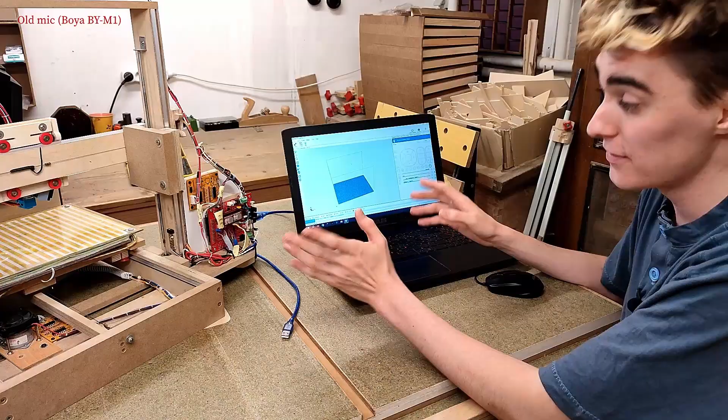The way this is supposed to work is by connecting it to a computer over serial, hence why the USB port on the Arduino was so important. For the software, I downloaded Repetier Host because it seems to be one of the few slicers that don't entirely rely on an SD card to transfer the G-code. I could use pretty much any other G-code sender, but when they're designed for a CNC router, they don't have the nice buttons for preheating the nozzle and whatnot.

The last time I hooked the Arduino Mega up to the computer, right after installing Marlin on it, I was able to connect, but it pretty much immediately shut down again due to the floating thermistor pins returning erroneous values and tripping over temperature protections.

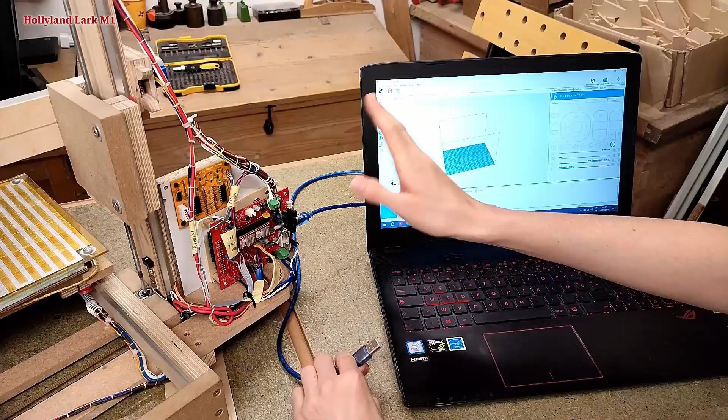So now, with the shield and everything wired up, I should be able to communicate with it and finish setting everything up. But when I did just that, I was greeted by the one thing I hate the most when working with CNC: an error message. A fatal error on the printer's side. Stop the printer until the error is fixed. Max temperature triggered. System stopped.

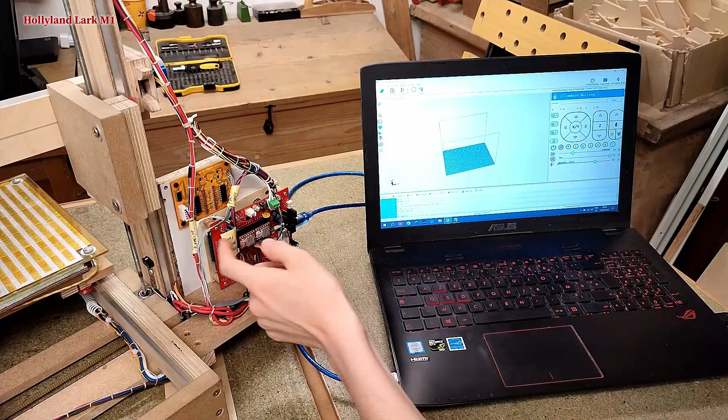For some reason, I was still tripping thermal runaway, even though the thermistors should have been providing the sensor inputs with a steady value. Double checking the wiring and probing the thermistors with a multimeter, the heat bed thermistor measured fine at around 5 kiloohms, but the hot end thermistor was dead short. Turns out the screw they used in my cheap hot end kit to keep the thermistor inside the heater block was screwed in with such excessive force it chafed its way through the insulation and literally shorted out the sensor. After fixing that, the thermistor was just fine.

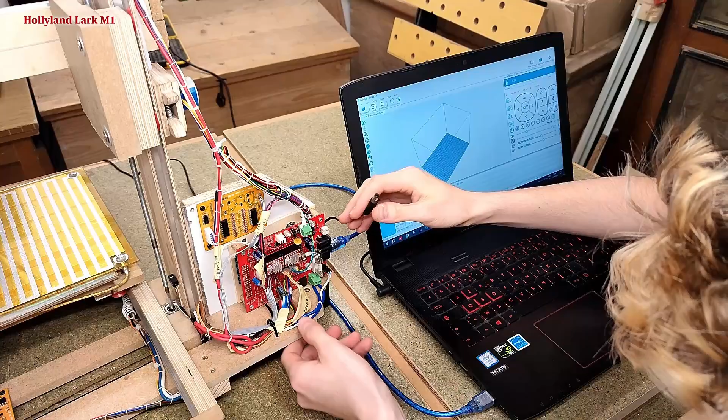So next, I tried to plug in the first power supply, the one for the Z-axis motor, because up until now, only the Arduino was running, powered by the USB port.

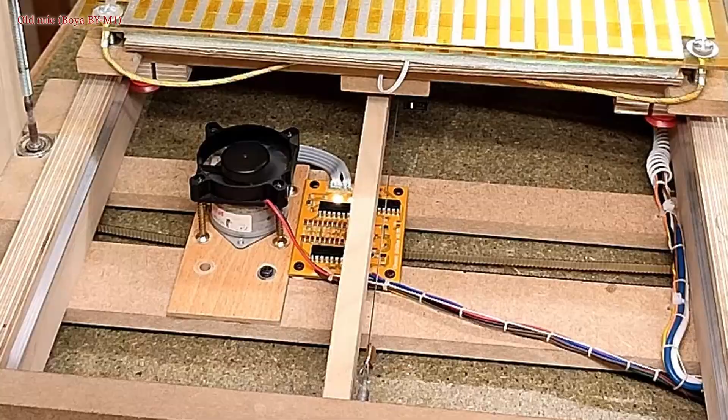Yeah, it's working! I can't believe it. It actually worked first try. And so did, miraculously, homing it.

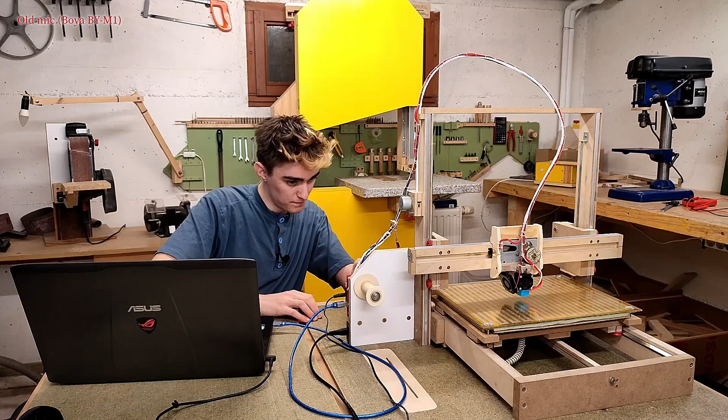As much as I'm used to my electronics never actually functioning when I power them up for the first time, the entire test of my DIY controller shield was pretty anticlimactic in hindsight. Of course, there was a moment of apprehension every time I plugged in a new power supply in case something would release the magic smoke. Nothing happens. Is that a good thing or not? But each time I was pleasantly surprised, it just worked.

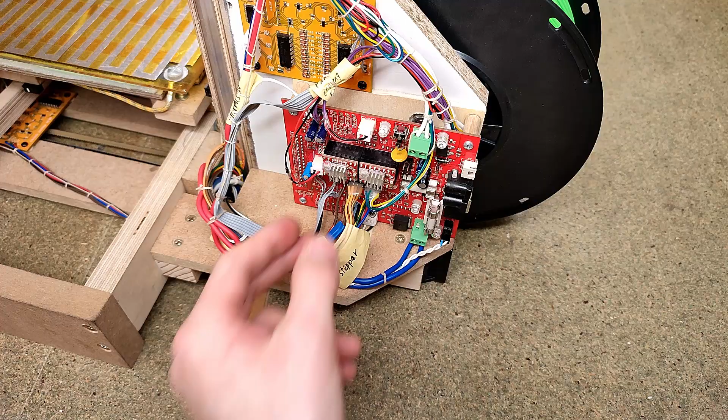Oh yeah, it's working! Obviously that was to be expected since I literally just copied the RAMPS board for my design, but you know how easy it is to make stupid mistakes when creating a PCB. The X and Y axis motions ended up being inverted, which was rather easy to fix by simply flipping the stepper motor plugs. Now, the one thing I was most worried it would fail was the MOSFET switching the heaters, because as opposed to all the other components on the board, I had used pretty much random ones salvaged from e-waste instead of the ones listed on the original RAMPS 1.4 schematic.

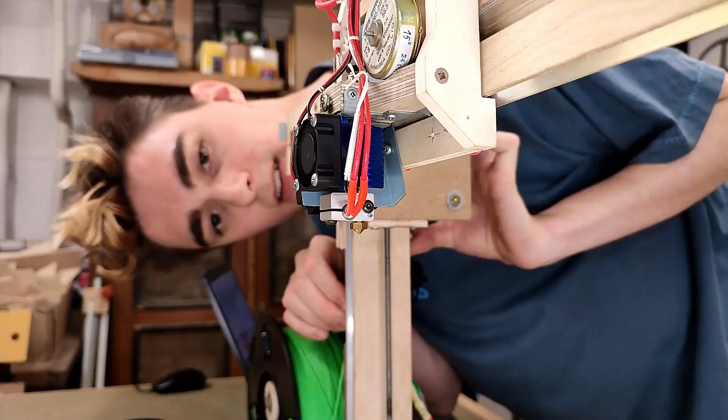But again, it worked like a charm. The hot end heated up, I was able to extrude filament, the part cooling fan ran fine, and the heated bed got warm. We have a warm heated bed!

So it was finally time to try printing something, and since I'm still more used to CNC router type machines than 3D printing, I wanted to do a practice run first without actually extruding anything. I already had it going when I realized it was preheating the nozzle and about to embark on the real deal unless I actively disabled the extruder. So I quickly stopped it again, and after changing my mind on the dry run and leveling the bed, I was ready for all my hard work of the past 2 years coming to fruition.

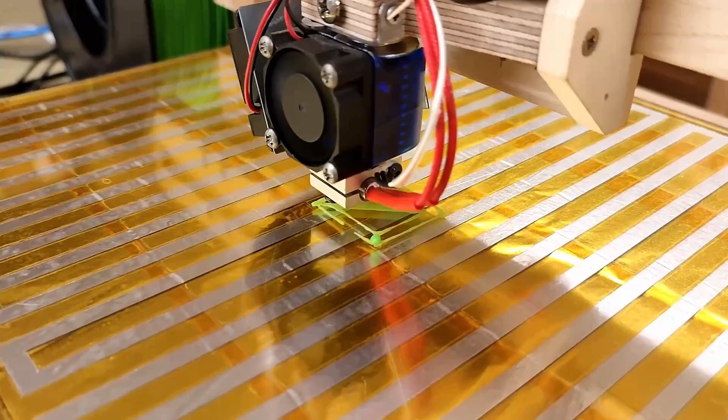It's printing! Oh my goodness, this is insane. It's horrible, but it's printing! Can you believe it? It is a 3D printer. It just works. Well, it doesn't work very well, but it is printing. Can you believe it? It's actually printing.

Just look at my face here. There I am, never having seen a 3D printer in person before. I spent 2 years of my life building this thing because I made videos about it for the internet. I have no idea how to use a slicer or what settings to use, and this thing just starts printing. That is absolutely amazing.

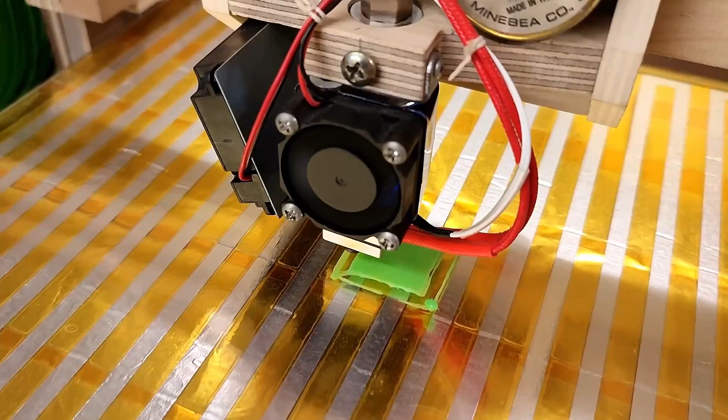I had no idea what settings to use. I just ran with something, and it is printing. That is incredible. It makes a hell of a lot of noise, but it's printing. It's not gonna be a good cube, but it's gonna be a cube. Oh my, I cannot believe it. This is so weird.

Now, unfortunately, this print failed relatively soon after due to the filament breaking and jamming the extruder. I have no idea why I kept trying with this horrible filament. I purchased it 2 years ago, and even though I never opened the sealed bag until recently, it soaked up so much water over that period that it sputters and foams up during extrusion like crazy. Maybe it even degraded, because it gets pretty liquid at the 200 degrees I was printing it at, even though the label says 205 to 220 degrees. Either way, it is in no condition to do any printer a favor. However, I pressed on with the next attempt anyway.

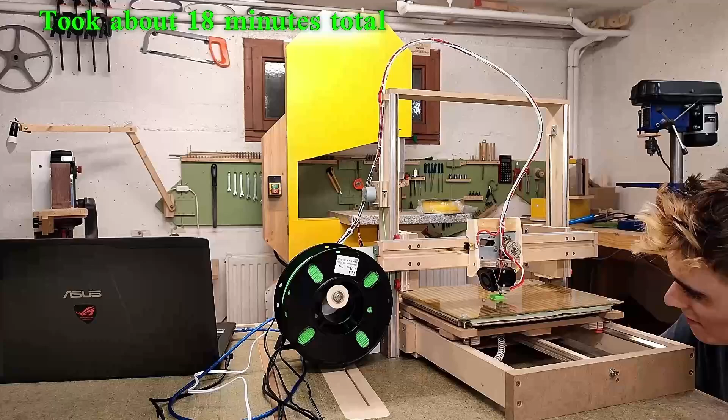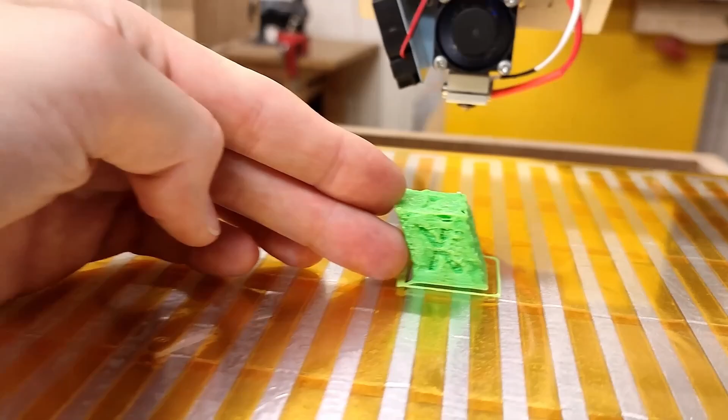And that is the very first successful 3D print finished, if you can even call it successful. It's very slanted because obviously the X-carriage is moving relative to where it should be. I already hinted at something like that in an earlier episode, and obviously it is happening. The X-carriage is moving over time, so every print will probably be like this until I do the lead screw upgrade. But since I need to do that upgrade anyway to get better resolution, I don't need to worry about it much.

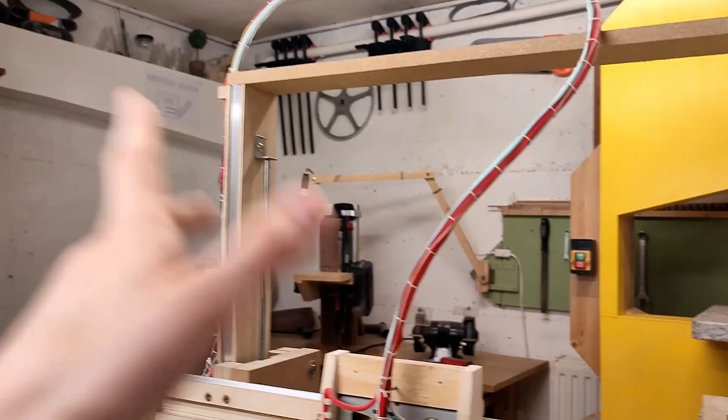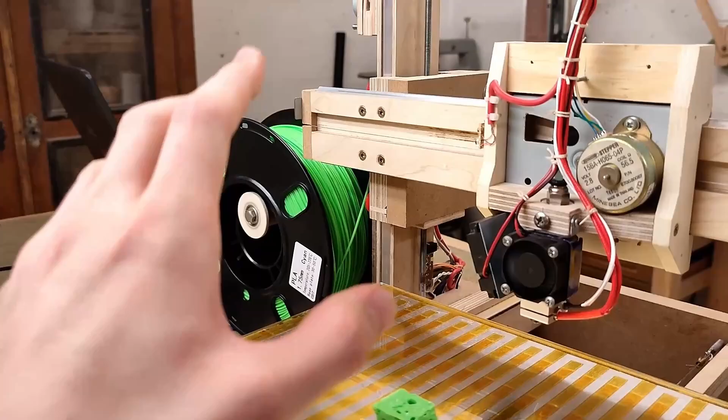The horrible filament is probably not doing it any favors. The printer isn't that terrible, I guess. We do have a very long Bowden tube, and people were worried about stringing — we do get some stringing here, and some weird extrusion issues. The fact that I only have one part-cooling fan probably isn't helping either. So this side is weirdly extruded, but a good chunk of that might just be the filament. This filament is absolutely awful, I don't know what's wrong with it. I'm gonna try the other filament next, the yellow Geeetech one, and see if that's any better.

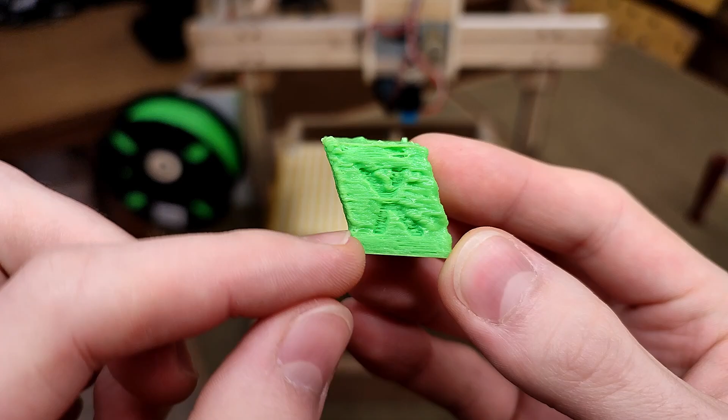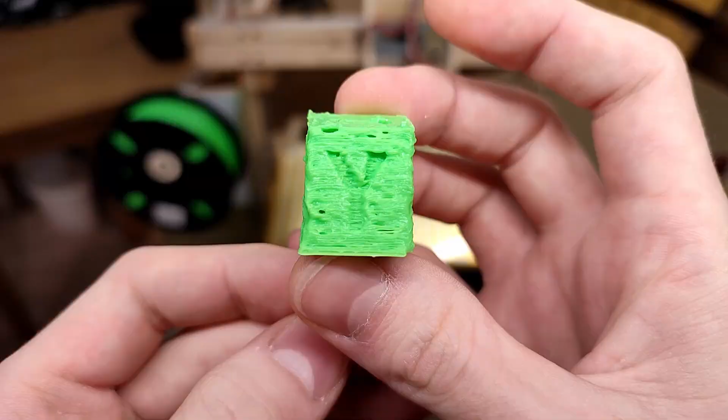Okay, now I really owe you the explanation for why we're getting these insane amounts of layer shifting, and let's just ignore all the extrusion issues, most of which were indeed purely down to the crappy filament. As you might have noticed, we're really only getting layer shift in the X direction — the Y-axis is pretty much perfectly straight. That's because, as those of you who followed most of the series will know, I used this wonderful 90s technique of a tensioned fishing line wrapped around a drive drum for the linear motion mechanism.

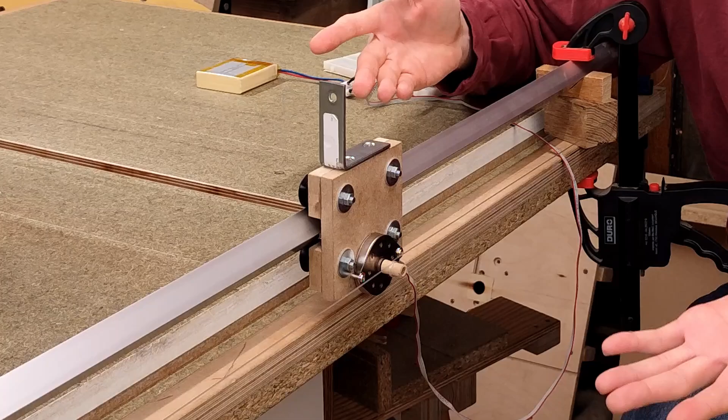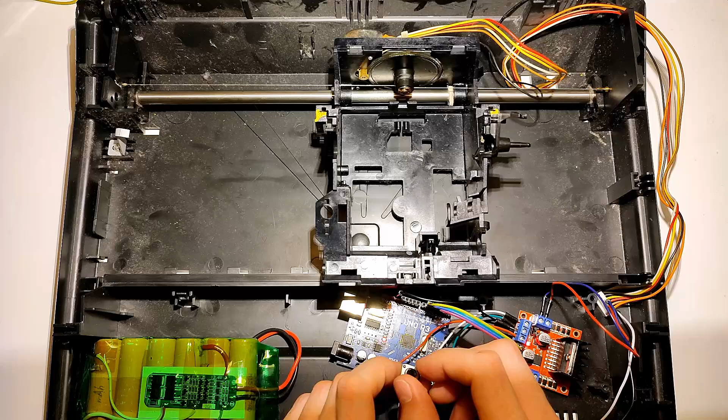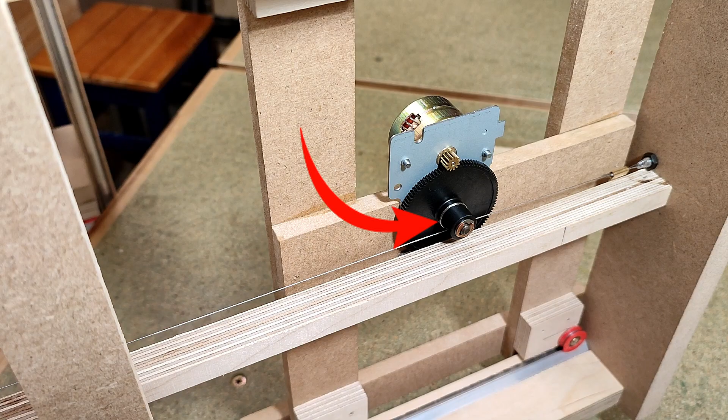The only difference between the X and Y axis is that the Y-axis motor had already been used in that very configuration to move the carriage of the typewriter I got it from back and forth, while the now X-axis motor used to spin the daisy wheel. On the spur gear of the Y-axis, you'll notice this big cylindrical section the string is wrapped around, which, for lack of a better designation, I call the drive drum.

Now, if I move my model here back and forth, you can see the coiled up section of string creeping up and down on that cylinder. And despite theoretically introducing an ever so slight cosine error into my positioning accuracy by bending the string outward or inward whenever the carriage is not in the middle, this is actually vital to functionality.

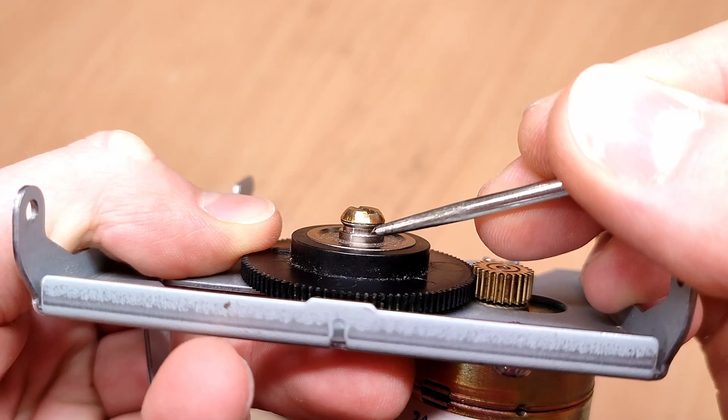On my x-axis gear, there was no cylindrical section, just a tiny groove for the daisy wheel to snap into, and because adding one would have tanked my steps per millimeter ratio due to the increased drive drum diameter, I simply ran my fishing line inside the groove.

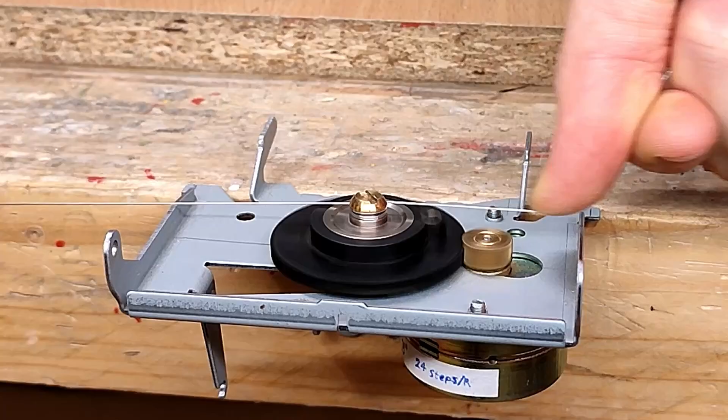Now, with the string suddenly trapped between two flanges, it cannot move up and down anymore, so it tries to climb up the flange to get there, which ultimately doesn't work, and the entire winding has to slip up the groove to make space for any new string to be wound up.

And as you might have guessed, on a rotating cylinder, it doesn't just slip axially with the rotation, it also slips in the rotation itself, because the one premise this entire method of propulsion is based on, friction between the string and the drive drum, got violated.

Now you might wonder, why does it creep primarily to the left and not equally in both directions the way probability would suggest? Simply because in a mechanical system with a random component like this, one direction always comes up on top due to the tiniest irregularities in literally anything. In this case, it might be the surface finish inside the groove and of the fishing line. I don't know, it doesn't matter.

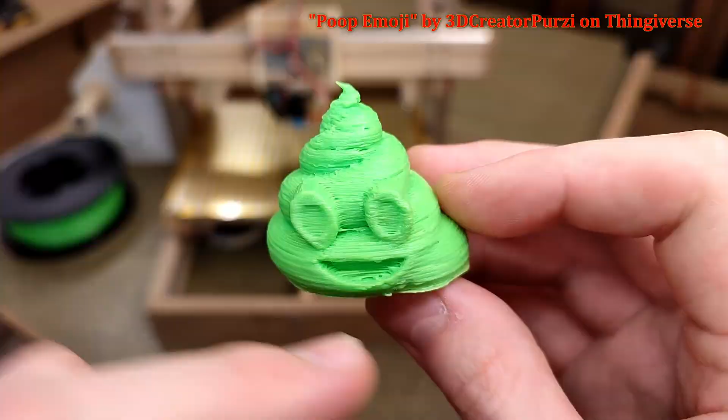Now back to my poopy prints. You might be slightly confused right now, wondering where all the layer shift went on that emoji. No worries, it's still there if you look closely, just much less pronounced.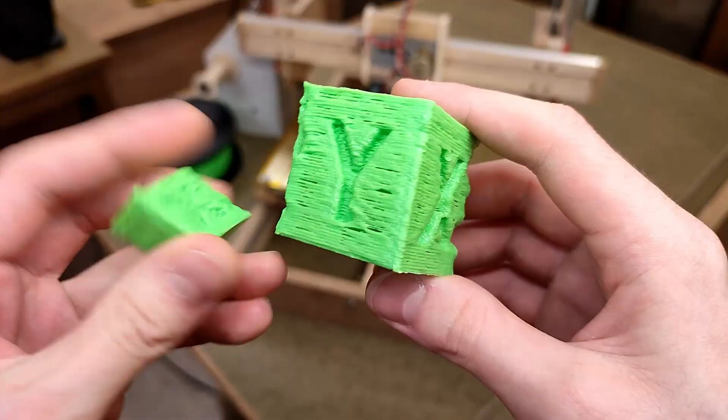Turns out, the simple act of tightening the fishing line was enough to rein it in to a much more acceptable level. The next cube I printed, a big one at twice the size, was already much straighter, even though you can still see a lot of under extrusion pretty much everywhere. This was with a 1mm nozzle and 0.4mm layer height, by the way.

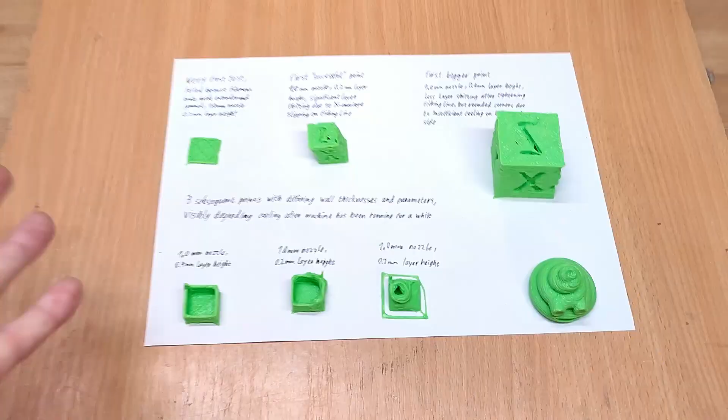I also ended up printing a few little boxes to try various settings, but those came out progressively worse. The only other thing we can learn from these tests is that my single-sided part cooling fan is definitely having an impact, as on all these prints you can see the right-hand side corners are a lot more blobby and melty than the left side where the fan was.

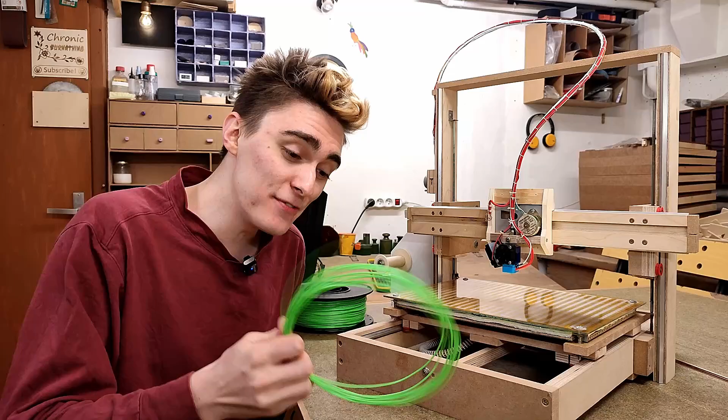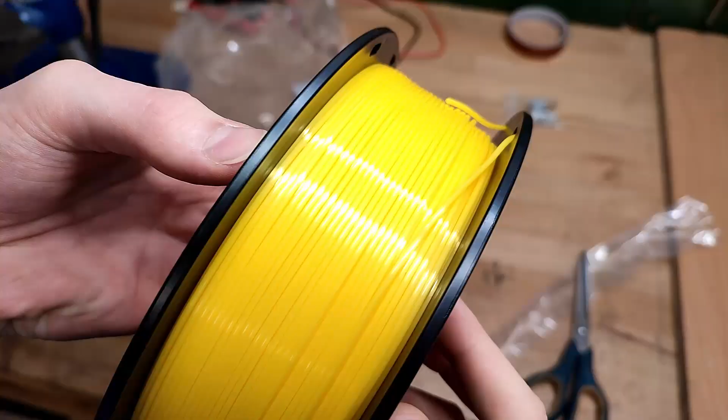So the green filament was obviously garbage, and to find out if this printer is any good, I needed to use something better. Fortunately, I had bought some Geeetech PLA just 6 months prior, so I got that unboxed, and oh my god, was it a lot better. It didn't even snap into 1,000 pieces like dry spaghetti when I bent it.

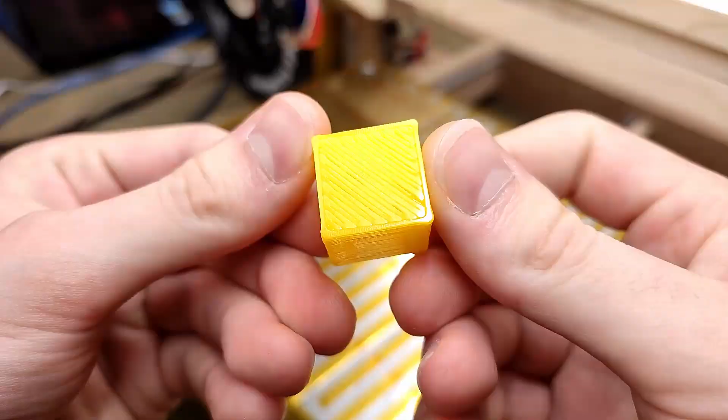And I couldn't believe my eyes when I printed the first test cube with it. The first layer was almost closed, the letters were legible, the sides smooth, only the top was almost as bad as before, but I suspected the slicer to be at fault for that, and most importantly, there were far fewer spots suffering from under extrusion.

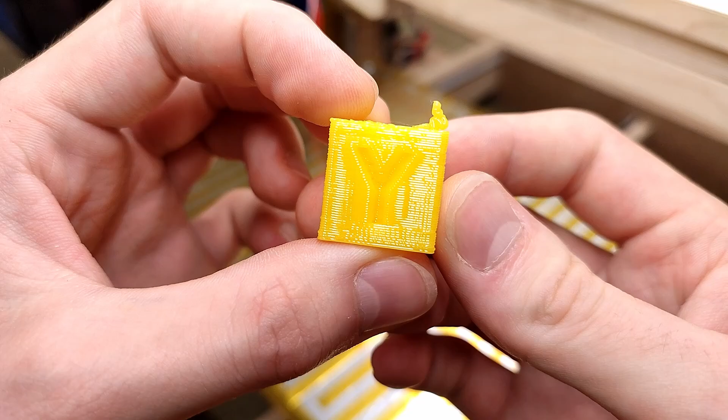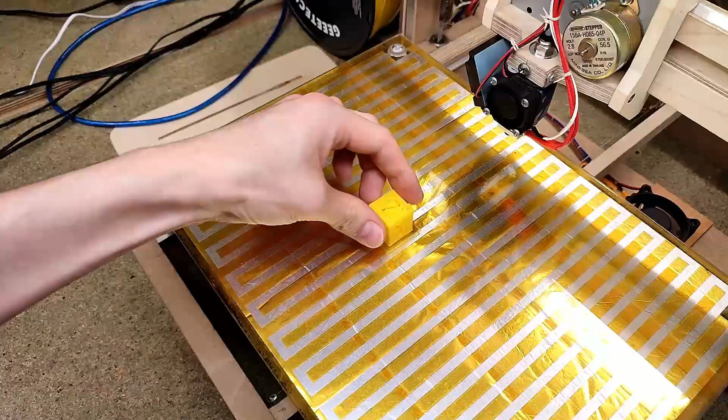Measuring the dimensions really didn't make any sense yet, but ironically, it was pretty darn close on both the X and the Y. I was so impressed, I immediately switched the 1mm nozzle to a 0.6mm one and printed another cube with 0.2mm layer height. As expected, that one came out a little more detailed, but not really any different overall.

And that's where I'm at right now. With a decent filament, it prints in a way that, while it couldn't be described as good in the grand scheme of things, is certainly good enough for us to actually see some of the inherent issues and to start using it to print parts in order to improve it.

Taking another look at these cubes, we see a mind-boggling amount of ringing and bulging corners. I did expect some heavy overshooting of corners simply from the large squishy steps of the motors swinging those carriages around in 0.1mm increments.

Just listen to the way it sounds. That cannot be good. Since that'll totally disappear once I install lead screws on this thing, I'm not even gonna bother trying to fix it right now, unless some change in settings happens to reduce it anyway.

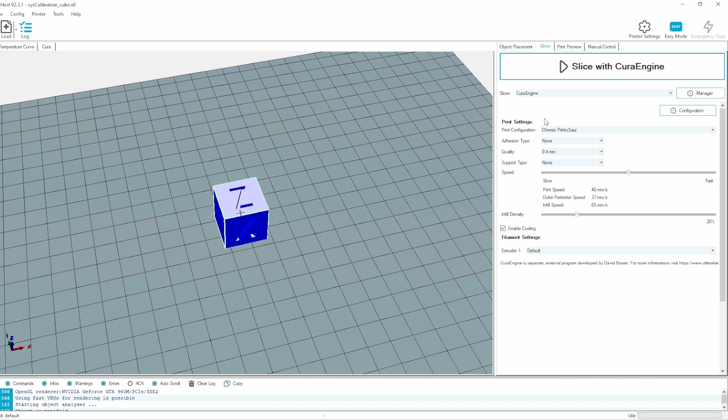The messed up top infill turns out to be a slicing issue. These parts were sliced using Cura engine in Repetier host, and if I do it again just now, you can actually see it trying to lay down the solid infill for the Z mid-air. That's never going to work. In addition, the top and bottom thickness was set to 0.6mm, which at 0.4mm layer height somehow works out to 2 layers.

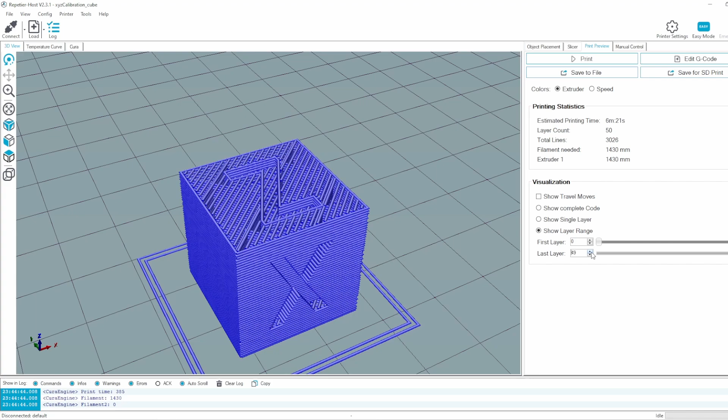I told you I had no idea how to use a slicer. However, since in the meantime I gathered a lot more experience using Prusa Slicer, and now have at least a rough idea of what most settings do, I'm going to use that to slice all my models from now on, and use Repetier host exclusively to control the printer.

Much more concerning is that we're still getting some occasional under extrusion here and there. That in itself isn't surprising, considering I used a 28BYJ-48 for the extruder and didn't shorten the Bowden tube. People in the comments told me I would get under extrusion, and I guess you guys were right.

Since I realized I could have mounted the extruder all the way at the top of the gantry, thus eliminating about 6 inches of unnecessary Bowden tube, I'm gonna take care of moving it up there right now before doing anything else. Of course, I don't want to redo all my cable lacing, so I'm gonna secure the last nut I want to keep with super glue first.

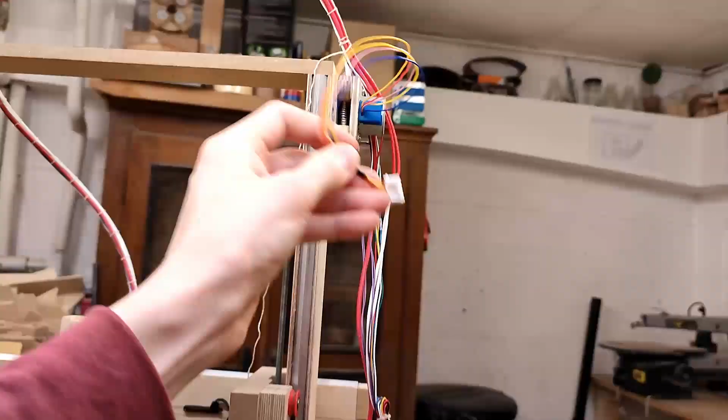And now my stepper motor cable is too short to plug into the driver, which is the exact reason why I didn't put it up there originally. So I'm gonna have to whip up a little extension.

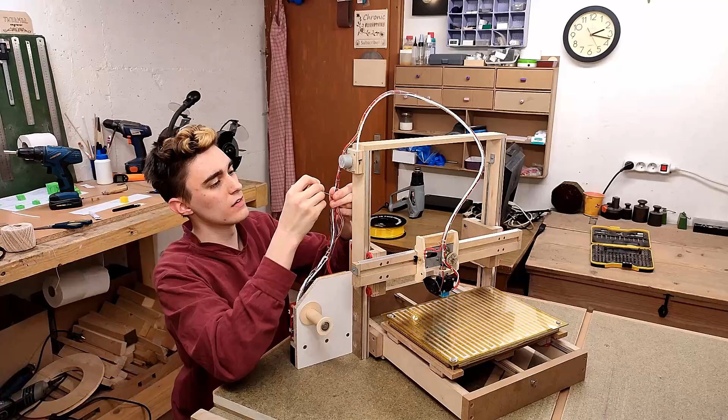Finally, I'm also going to torture that 28BYJ-48 just a little bit by replacing its 5V power supply with a 6V one. Someone in the comments mentioned they don't necessarily burn out on 6V, so we're doing it because I need every little bit of extra torque I can get here.

I will go back to 5V later though, because when I install these screws, I'm also going to put the extruder on the X carriage together with the hot end in a direct drive configuration. That'll get rid of the Bowden tube altogether, and thereby theoretically should require much less torque from the extruder. Anyway, let's set it up to print something.

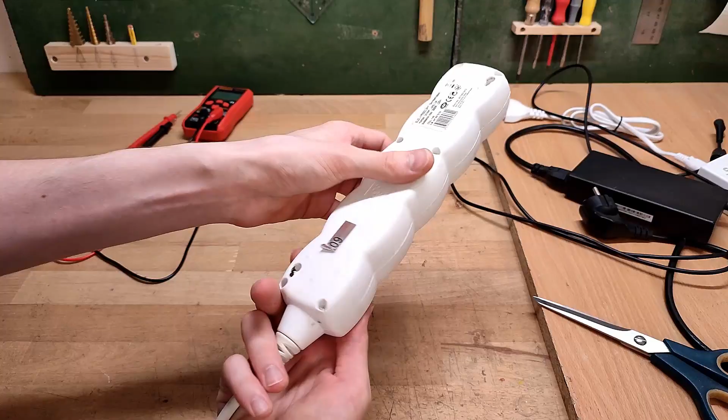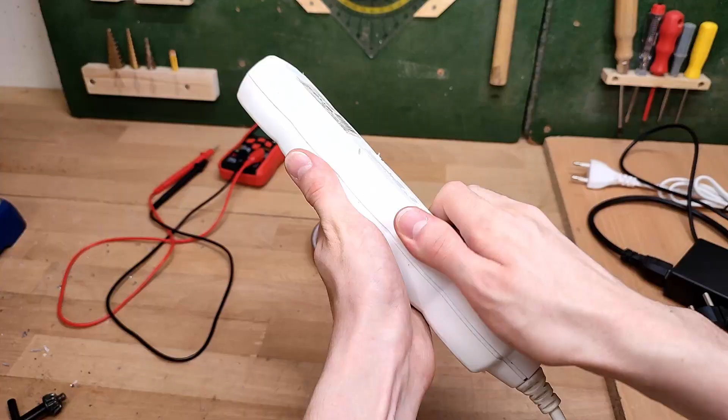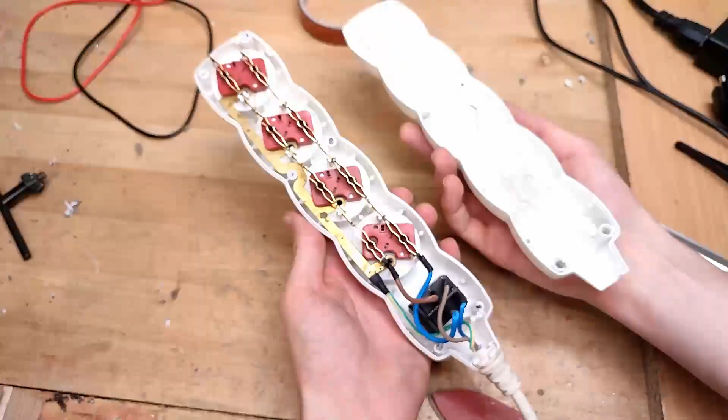I'm pretty sure you already gagged at the idea of having to plug in this many power supplies for a single 3D printer, and yeah, you need a switched power strip for that not to be a pain in the butt. True to the original spirit of the project, I took this one that had stopped working due to the switch contacts being dirty, drilled out the heads of those god-awful unkeyed screws - big Fs in the chat for any company trying to keep me out of their product - and cracked it open to take out the switch. Those generic switches can actually be popped apart with a screwdriver, and yeah, just grimy contacts. Sanded those fresh and clean, reassembled it using super glue to replace the annihilated screws, and wouldn't you know, it works a treat.

Of course, it would be pretty inconvenient having to drag around my normally stationary editing computer to stream G-code to my printer every time I want to 3D print something, so I coaxed this 2009 netbook out of my dad, who primarily used it as a paperweight on some pile of trash, and installed a lightweight Linux distro on it called Q4OS. I did a short about that some time ago, so now I have a dedicated user interface for my 3D printer. Since I'm kinda allergic to tiny screens, I also dug out this thing they used to call a TV back in the day to actually be able to see what I'm doing. So that is why I've had this e-waste collection on my table for the past like 6 months, just in case you wondered. Anyway, let's print a new cube, hopefully without under extrusion.

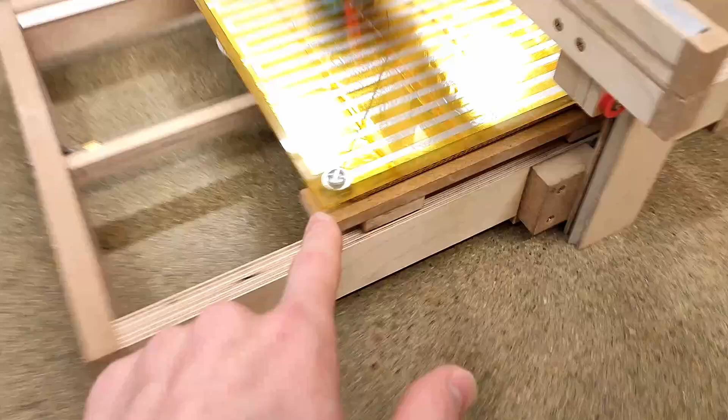Uh-oh, the unthinkable happened. My print bed just cracked. I figured I would manage to smash it sooner or later. Earlier I noticed there was a tiny crack in the corner going to that screw hole. I figured it wouldn't propagate past the screw hole, but when I was heating it up just now, it went right there to the middle of the print bed, which is not good. That's the last thing I needed to happen right now.

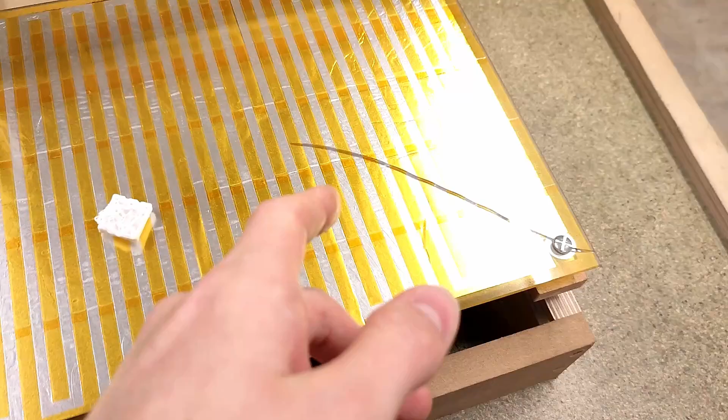Of course my print failed too, because I turned off the heated bed as soon as I saw the crack spread, so the cube detached from the bed as it cooled down. This is definitely one of those situations where you just want to click undo in real life and make it so it never happened. I don't even know when or what I hit it with to initiate that crack.

I guess we're gonna have to print our cube and Benchy on an unheated bed then, until I get an entire new heated bed made for the next episode. What I wanted to say before all this happened is, I'm giving it the best chance at working this time by using a known quality filament, namely some of the leftover Two Trees stuff.

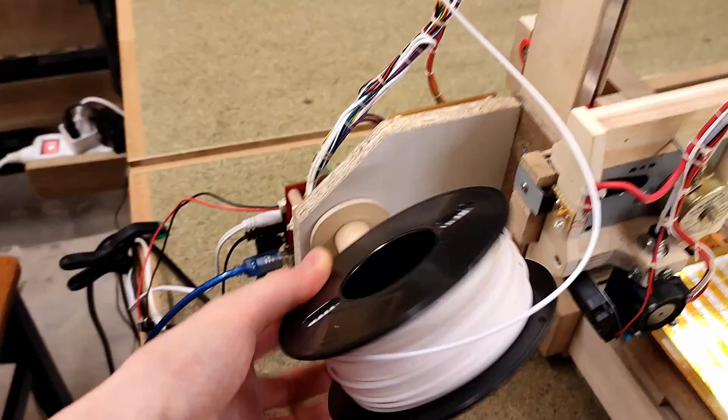I'm sure the G-Tech filament works just fine, but I know for a fact this one somehow extrudes more evenly. Only downside, it has a matte surface finish, which does provide more friction in the Bowden tube. So here's the test cube. I removed all heat bed commands from the G-code, and just to be safe, I'm also going to unplug the bed power supply. Can't risk that crack propagating any further and breaking the bed in half.

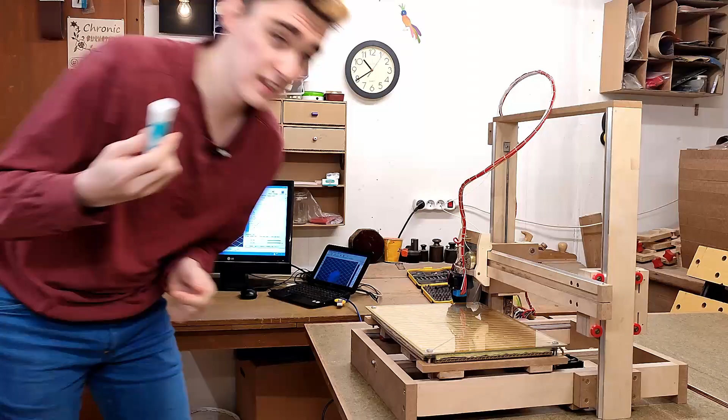Let's crack out the glue stick of shame and see if we can print stuff regardless. Power is on, nozzle heated up, let's run the job. It's homing. There it is, purging.

I really hope that sticks. Doesn't really look like it. Oh yeah, there it goes. Well, that's the grand finale of my video thoroughly ruined. I was planning to print a few other things as well in this episode, namely some bed leveling knobs and an air duct for the part cooling fan, but it doesn't look like that's gonna happen now. I guess glass is glass, and glass breaks.

I was really afraid of something like that happening ever since I made that bed. After all, the design with just a heated glass plate and nothing else to mechanically support it is quite fragile to begin with. Plus, with making these videos, I tend to handle most parts at least twice as much as I would if I just built this thing for myself.

By the way, it's printing with a 0.6mm nozzle and 0.3mm layer height. Not gonna lie, watching 3D printers is pretty boring, and filming them is even more boring.

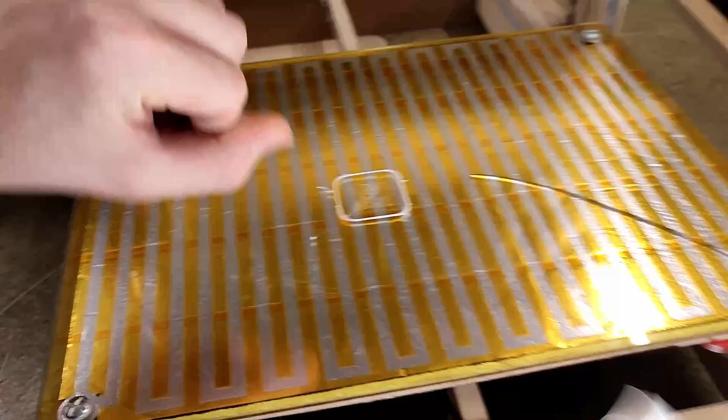Still nowhere near as good as I hoped. The top certainly is a lot better now with proper slicing, but the solid infill still isn't fully closed, and I'm also still getting these weird artifacts. Certainly looks like under extrusion, but I'm not entirely sure. If anyone knows, tell me in the comments.

I'm gonna try the exact same thing again with the yellow G-Tech, just to see if there's any difference. This certainly slides a lot better in the Bowden tube. And that first layer is a lot better if you ask me. Can't really show you because the printer is in the way.

I didn't actually plan on recording this cube at all, but seems like the first layer is a lot better. Twenty minutes later, and there it is, done. At least it's not lacking in the bed adhesion department. Ugh, can't get it off. There we go, not too shabby.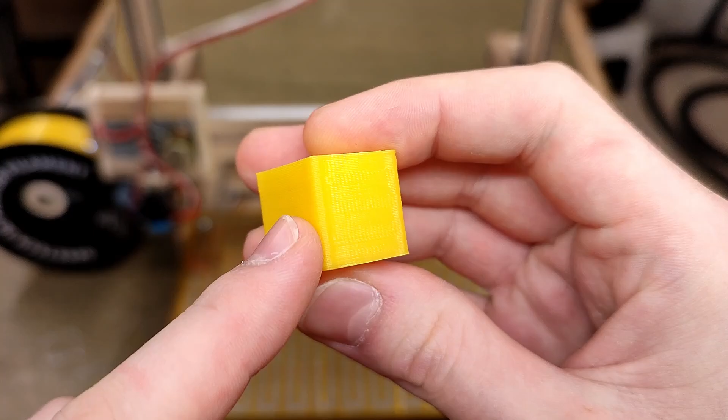I guess it was under extrusion then. Those artifacts are all but gone. That is pretty good, actually. Look at that, we're still getting some artifacts from the stepping of the motors, but this is pretty neat. Even the first layer is almost totally closed.

Interesting. So with this Bowden tube, I'm really operating at the very limit of what the 28BYJ can deliver in terms of torque. Let's do the stupid thing and switch to a 0.4mm nozzle and 0.2mm layer height. Stupid, because with a 0.1mm overall resolution, if the carriage moves just one step further, you immediately get 25% overlap or even a gap between two adjacent filament strings.

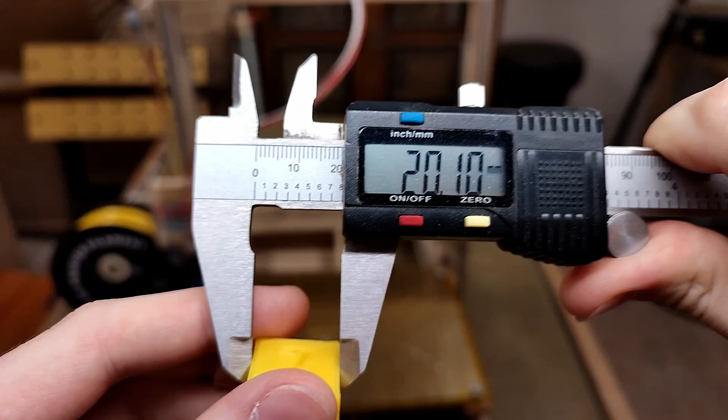I actually saw one of those gaps on the cube already. Right here, the outer perimeter is slightly detached from everything else. That's what you get for crappy positioning accuracy of your printhead. Then again, if I measure this cube, it's surprisingly accurate still. Of course it depends on where exactly you measure it because of all the ringing, but overall, it's pretty good.

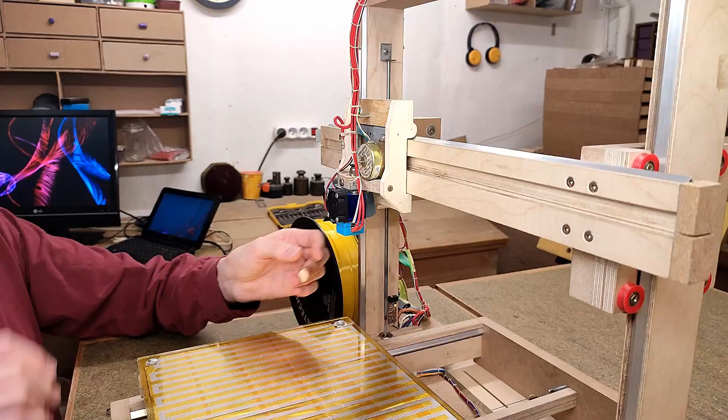Moments later. That generic V6 hot end is a huge pain in the butt to change the nozzle on. I had to take the whole thing apart because the stupid heat break constantly unscrews from the heatsink. Of course, not helped by the fact that my neat cable management doesn't let me pull out the Bowden tube at all, and the silicone sleeve only stays on there with a wire around it.

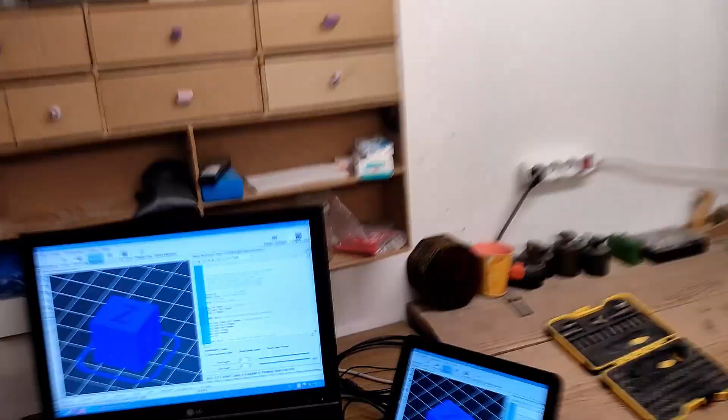Anyway, XYZ calibration cube with 0.4mm nozzle coming up in 3, 2, 1.

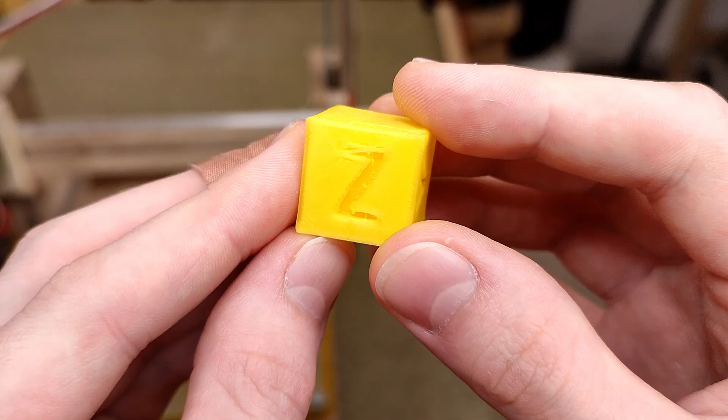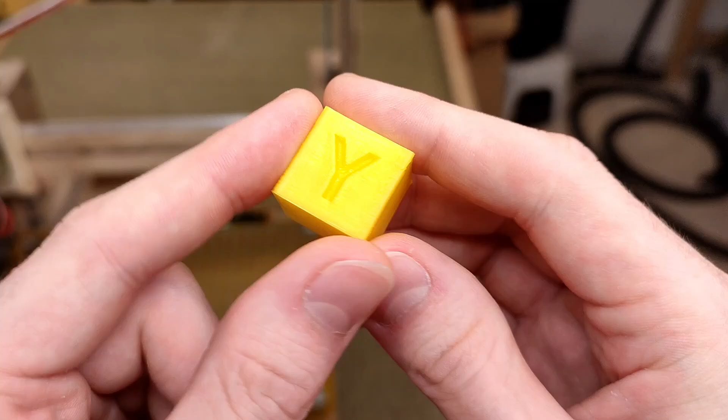This is pretty good. Honestly, I cannot complain considering just how much jankier this printer is than a real machine at least 4 times the cost. Not to mention, we're working with a resolution of 0.1mm here, which is literally an order of magnitude less than what any standard 3D printer does, and yet we still get parts like this out of it.

I mean, it is a shame it has this chronic layer shift going on, making every print slanted, otherwise these would be some totally usable parts, but it's pretty impressive nonetheless. Plus, this is nowhere near the end of the road yet. I still don't entirely know what I'm doing in the slicer, and with a bit more tuning, parts could probably

turn out even better, and as soon as I install lead screws, all those other artifacts you saw there should just go away as well, leaving us with totally acceptable 3D prints from a 3D printer built out of trash using technically unsuitable stepper motors controlled by what amounts to e-waste.

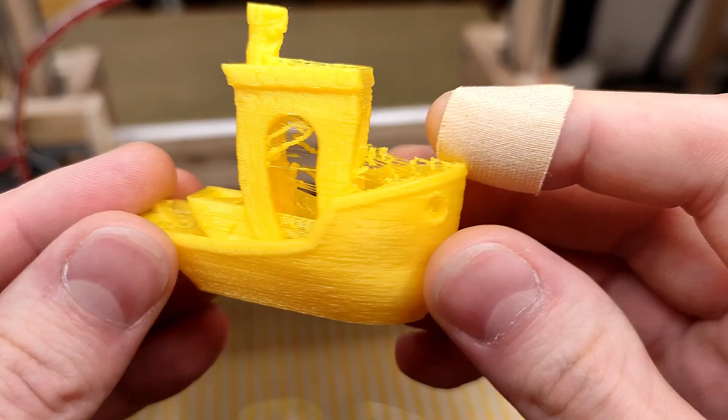But I know what you're really waiting for. It's this infamous little guy here, right? Well, your wish shall be granted. Here we go. I have definitely seen better Benchies in my lifetime, not gonna lie.

It's interesting what the constant layer shift does to a more complex model, because of course, as some layers take longer to complete than others, the printhead shifts more overall on those. That's why the bow looks a lot more smushed where all the solid infill for the deck is, and as soon as the hull is finished, you can see the cockpit straighten out a bit.

Also, as expected, there is no visible layer shift in the y-axis, since, save for the abysmal resolution, it works just fine. There is a lot of stringing. I disabled retraction because with an extruder this slow and a Bowden tube, it oozes even while the extruder is in the process of retracting, so it didn't really do any good and unnecessarily increased print times.

So obviously I've still got quite a ways ahead of me if I want to get decent parts out of this printer. It's definitely doable, but I may have cut a few too many corners and knowingly set myself up for failure with that X-axis fishing line.

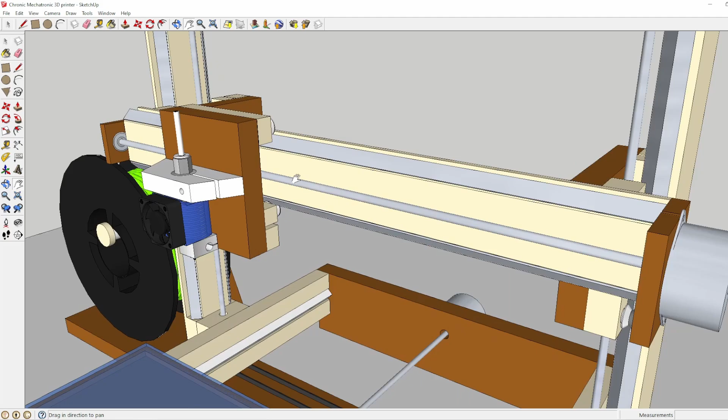It's kinda ironic because in my very first draft of this machine, I was totally intending to use lead screws, and then I thought, oh no, it'll be so slow, people aren't gonna like it, plus I need to get so many things parallel, and I went with fishing line when I really should have trusted my gut and used lead screws.

What's the bottom line? If you just want a 3D printer, buy a broken secondhand one for cheap and fix it. If you're looking for an adventure, by all means do what I did, take an old typewriter and go to town.

I guess that's it for this video. I'm gonna make a new heated bed from scratch the exact same way I did this one off camera, and I'll catch you in the next episode where I'm going to talk about everything I need to improve on this machine in order to have it spit out acceptable parts. Benchies that maybe don't look like a pug or like they ran into a brick wall.

Turns out, there may actually be a reason nobody tried building a 3D printer for $50 until I came along. It's really hard and just not worth it.